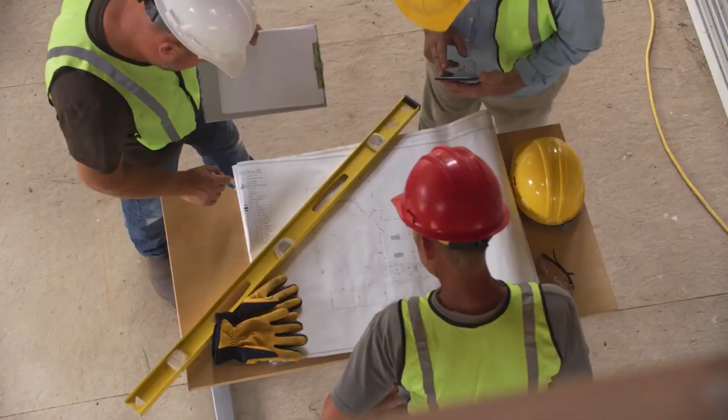For decades now, there's been an environmental movement raising important questions and inspiring more sustainable solutions. Just compare yesterday's gas guzzlers to today's electric vehicles, or how recycling has almost become second nature. Over the next 10, 20, 30 years, zero net carbon building standards will be a key component in addressing the impacts of climate change we are now facing.

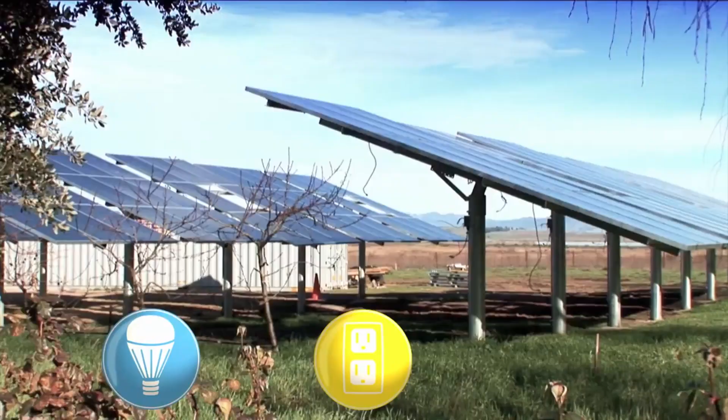You might be wondering, what exactly is a zero net carbon, or ZNC, building? In a nutshell, ZNC buildings have three characteristics: they are energy efficient, they are fully electric, and they use carbon-free energy sources, such as solar or wind, to meet operational energy needs. This concept applies to all building types: homes, businesses, schools, fire stations, you name it.

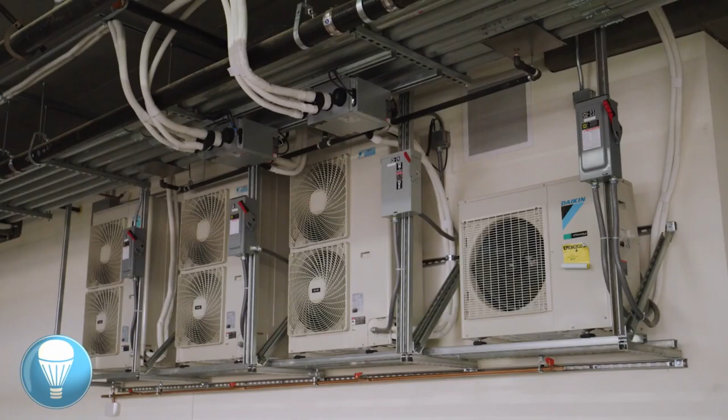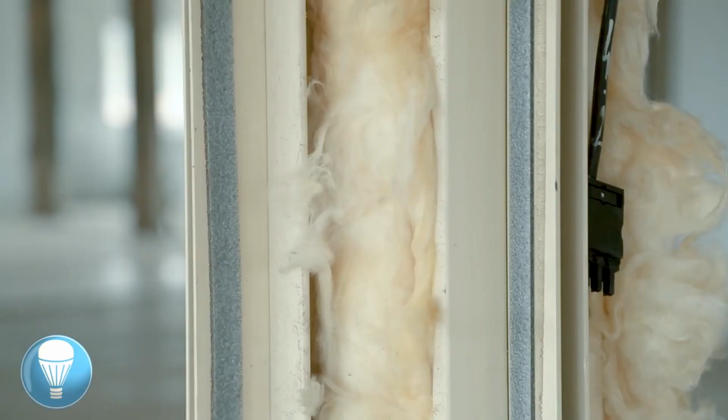A ZNC building starts with energy efficiency. One of the simplest ways to improve efficiency in an existing building would be to install LEDs or use natural light and buy ENERGY STAR labeled equipment and appliances. Did you know natural lighting has been proven to improve learning in classrooms and employee productivity? ZNC buildings feature ideal interior climates and less noise pollution due to energy efficient insulation. New technologies like smart thermostats work with these improvements to only use energy when and where it's needed.

ZNC buildings must also be fully electric because natural gas, which is mostly methane, produces greenhouse gases and decreases indoor air quality.

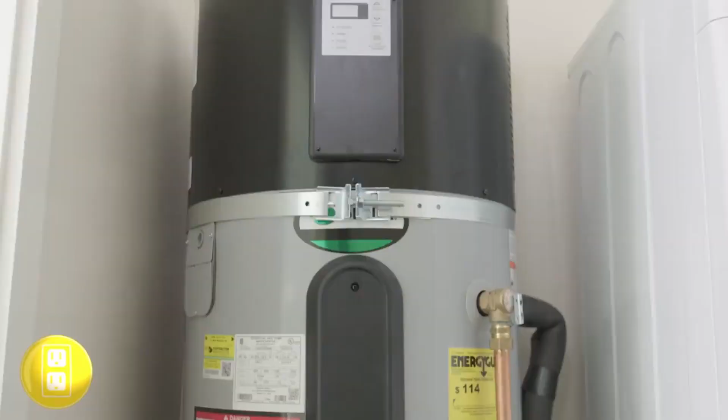Efficient electric options such as induction cooktops and heat pumps for heating spaces, cooling spaces, and heating water are already widely available. The third key part of a ZNC building is ensuring the energy used is carbon-free.

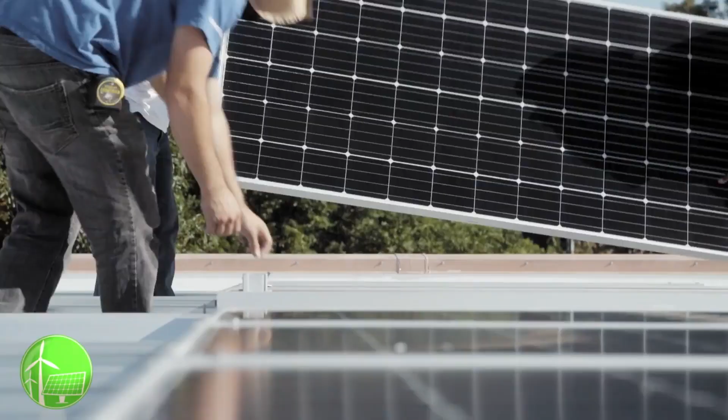Harnessing the power of the sun will go a long way to make that happen. The costs to install solar have declined dramatically, simplifying the decision to choose solar energy production.

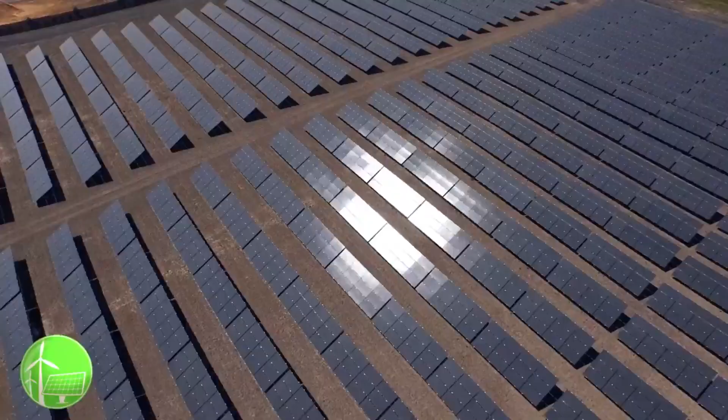Even better is when on-site solar generation is paired with battery storage and electric vehicle charging stations to add both convenience and reliability. For buildings that are not well suited for solar or can't generate enough energy to meet their needs, ZNC is still achievable by purchasing 100% carbon-free or renewable electricity from your power provider.

The strongest ZNC benefit is the improvement in quality of life for you, your family, and the community, with utility cost savings, cleaner air, and more comfortable living spaces.

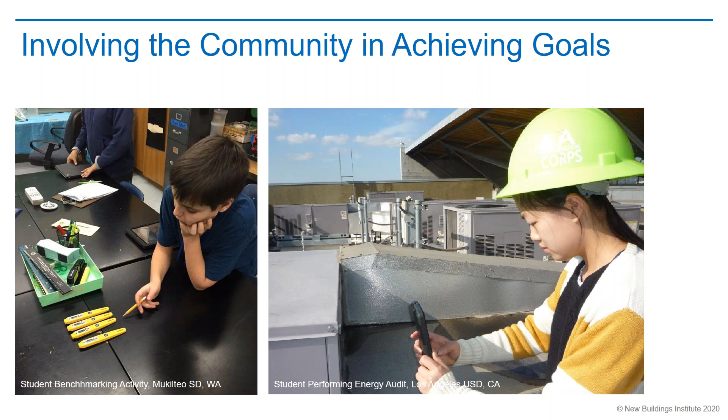So I'm going to tell you a quick few stories as examples to really showcase how powerful storytelling can be. I hope some of you come out of this really jazzed and excited about what the power of students and the power of the Zero Hero can do.

The first two are powerful because we as adults, even those of us who are Zero Heroes and may drink the sustainability Kool-Aid, can be constrained by things like societal norms and budgets, making it difficult to find new solutions. Students really have the ability to think outside the box and gain support for solutions that benefit the whole school in a way we might not be able to.

Focusing in on California, in Kern High School District in Bakersfield, students rallied the school board and testified with real data they analyzed about how much money the district would save by switching to solar. In partnership with SunPower, the district installed 22 megawatts of solar power systems at 27 Kern High School District sites. With the new solar installed, the district will save - wait for this number - $80 million over the next 25 years, which can be reinvested back into the schools.

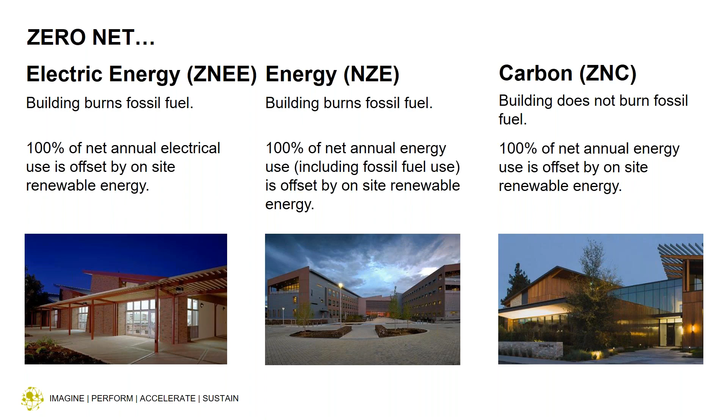Having said that, the first part of this presentation, what I want to do is show you that there's already been a lot of schoolwork done that's net zero energy. It's not something that's brand new, and it's not terribly difficult to do, especially here in California. There's already a fair amount of it that's been done, so it's not something to be scared of.

So this is our first net zero electric energy project. It was done back in 2004, so that's 16 years ago. It's in Campbell Union High School District, Westmont High School, and then another project, Delmar High School, another science building.

In that same district, later we went in and did PV projects in the parking lots for all 8 sites that they have. Interestingly, you could call this net zero electric, but actually it would really be net zero electric energy costs, because the PV systems were slightly undersized so that the bills would go down to zero. That's probably no longer the case because the rate structures have changed and the high rates have shifted till later in the day, but anyway, these were at the time designed to be net zero electric energy cost.

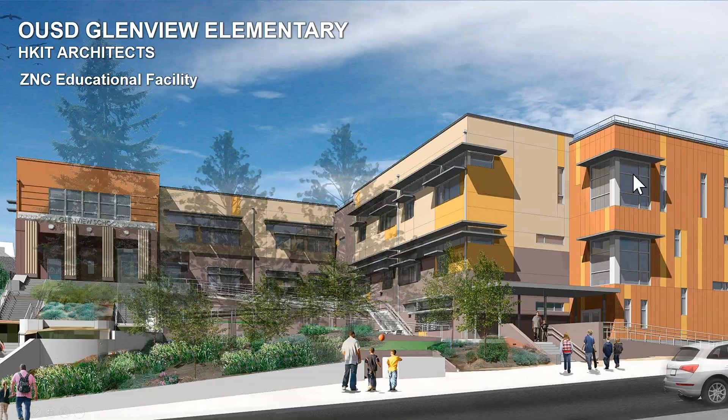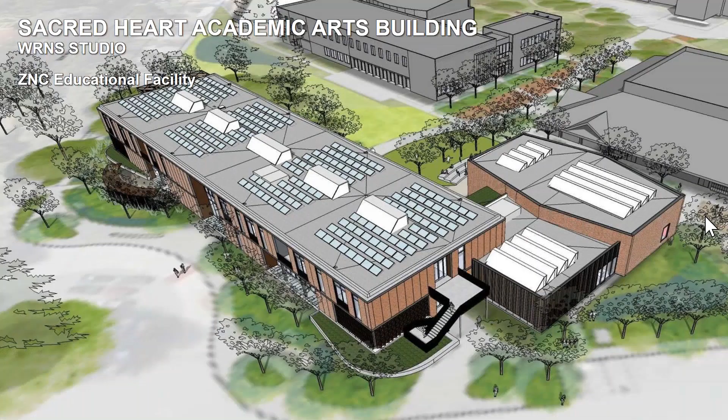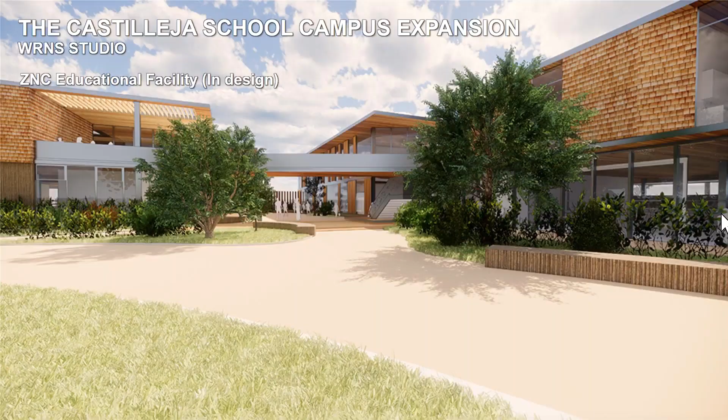We've done also a series of projects for private schools. This is Lick Wilmerding. All these are in the Bay Area: Sonoma Academy, Bishop O'Dowd, the Mark Day School - this one's just recently completed, so we don't have photographs - Sacred Heart Academic Arts Building, and Marin Country Day School Science Building. And one we have under design currently is the Castilleja School in Palo Alto.

Then we've also done some higher education projects: Pitzer College down in LA, CSU East Bay is in design, a library on the east side of the bay, and a downtown center for UC Merced. And then a couple of projects - these aren't schools, but I thought their significance was worth talking about, just so people can understand that this is really becoming a mainstream thing.

So this is one of a series of 5 projects that we've done that are remodels, low-cost remodels of existing buildings. This one was for a for-profit developer, and it's gotten to the point where renewables are cost-effective enough that he decided he could do this to make a profit. So this is the Indio building.

There's 3 new construction buildings that we've been involved with that are also for-profit developers, that are net zero or zero net carbon. And then we've also done municipal buildings that are zero net carbon, and a series of community buildings. These, John, were involved with - two libraries, one in Half Moon Bay and then another one in Hayward.

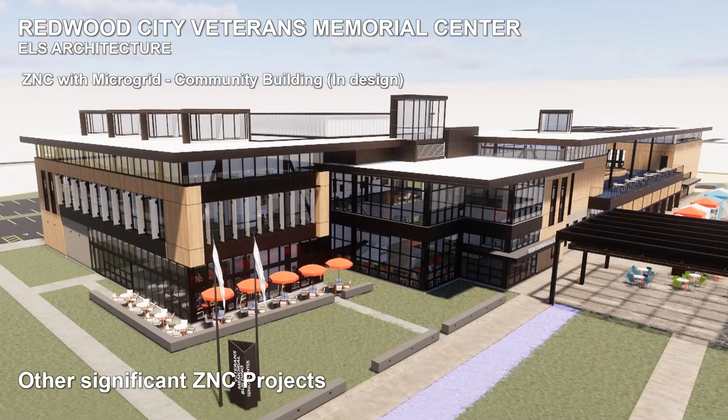And this last one is kind of interesting. This is in design still. It's not only zero net carbon for the city of Redwood City, they actually went a step further and are putting a microgrid in, so this building can be used for resiliency. So the idea is if there's an earthquake or a fire event, that they can use this building if people lose their homes to temporarily put people up.

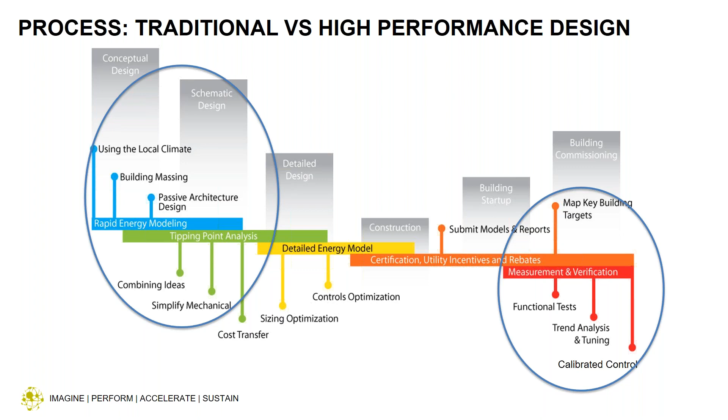So one of the things we talk about a lot is the idea of cost transfer, and that is focusing on passive architectural strategies that can save a lot of energy in the design of the building through simple strategies that I mentioned: siting, organizing the building, solar orientation, natural cooling, etc., that will allow you to reduce the size and complexity of mechanical systems.

And then ideally, you can take the budget out of those mechanical and electrical systems and move it into the architecture budget for the project, enhancing that architectural budget. This is really great for the owner, the school districts, or the school leadership, because you're investing in the architecture of the building, which lasts 50 plus years, instead of engineering systems which only last 15 to 25 years, have to be replaced, require maintenance, and use energy. So the more you can focus on architectural strategies to save energy and get down to the EUI, the annual energy target you're looking for, the better.

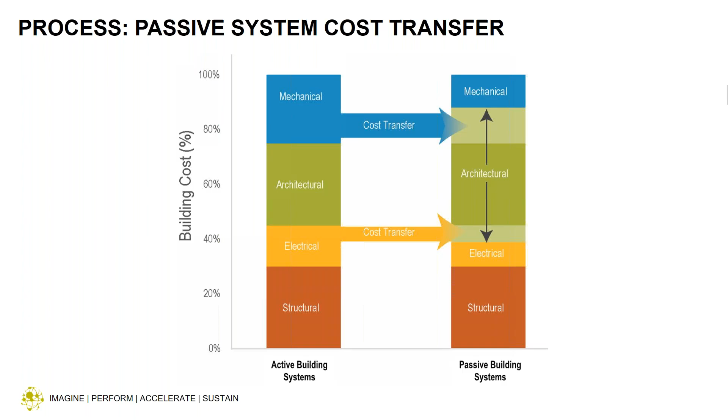All right, so let's look at a couple of strategies. I think the video was great that we saw, and it kind of started to investigate a little bit on the strategies, but let's talk about it a little bit more here.

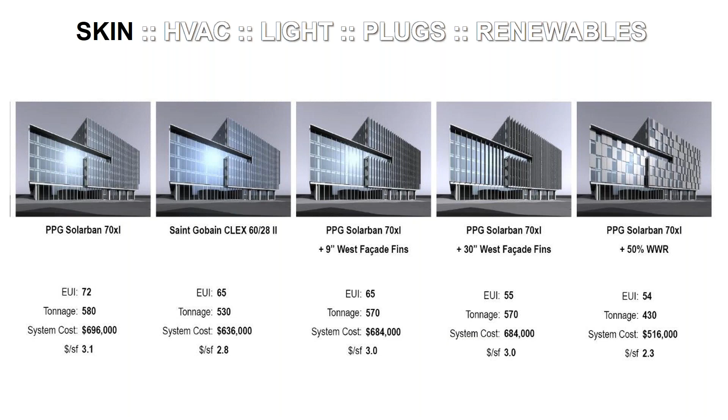Same with this mechanical system cost, reduced, reduced. So now you've got the ability to find this cost transfer, find ways of optimizing the envelope to reduce the size and complexity of the mechanical system, reduce the overall energy use, by putting more into the envelope of the building.

And similar to this project that David actually showed you a couple minutes ago, this fixed budget project, typically the idea of adding a very large, intricate brise-soleil type screen on the outside of the building to control solar gain might seem like it's not going to meet the budget of the building.

However, on this project, what you see on the bottom two screens is an indication of solar radiation hitting the building. We were able to reduce the mechanical system size and complexity on this project to take out of the mechanical systems budget the cost to pay for the brise-soleil, the big shading device on the outside of the building, and turn this building into a zero net carbon building with a really reduced EUI. That's another example that could apply to any kind of education building.

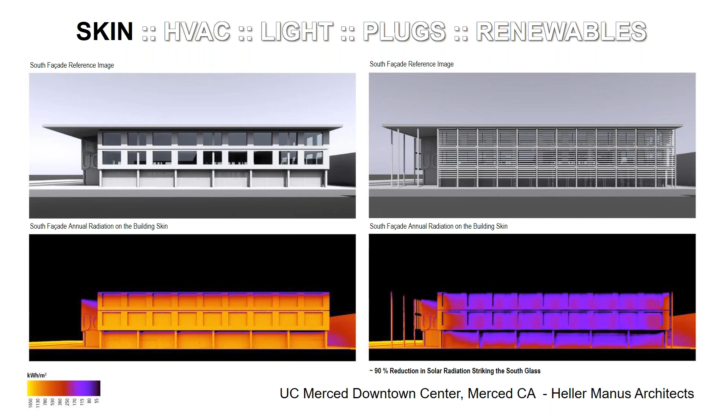Next. So skin was first, HVAC is second, and like you heard in the video, it's all about heat pumps. That's your methodology for getting to an all-electric building.

And there are so many versions and flavors of heat pumps. I thought a lot about how I would explain all of them in this presentation, and decided I wasn't even going to try because there are so many different versions. But commonly you'll see some of these on the screen—just a few of the sort of methodologies.

An air source heat pump on the far left is like an air-cooled chiller. If folks on the phone have seen or used that, it's not uncommon around the country to use those on small to mid-size education projects. The air source heat pump switches over from cooling to heating—essentially it works the same as an air source chiller, but also provides hot water, and it can actually do it simultaneously, chilled and hot water to your building.

In the middle is a VRF heat pump. You may have heard of this as it provides refrigerant to the buildings and to fan coils in buildings. We are somewhat shying away from this system because of the high global warming potential due to leakage of refrigerant. The manufacturers are working hard to mitigate that, but it should be taken into account if you're considering VRF heat pumps.

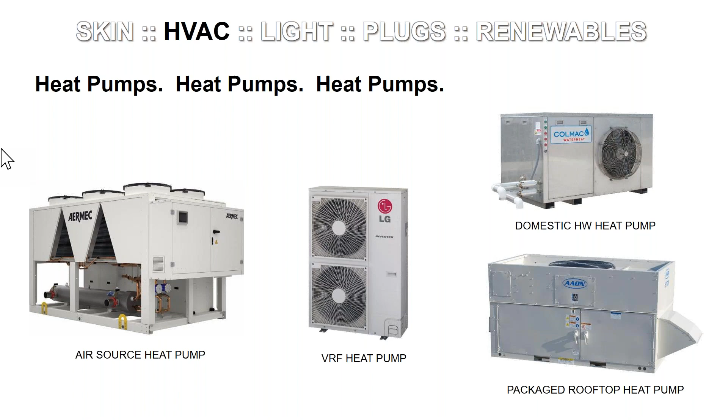The other important mechanical strategy on most, if not all, of these zero energy projects we're doing is using heat recovery, especially if you have a DOAS system, which brings fresh air into the building decoupled from the cooling and heating systems. When you're doing that, you can pre-cool or preheat that fresh air coming into the building using heat recovery. It's very common in California and where we're doing a lot of our work, but I think also common elsewhere in the country. It's quite important to reduce that EUI and deal with the energy it takes to cool and heat the fresh air coming into the building.

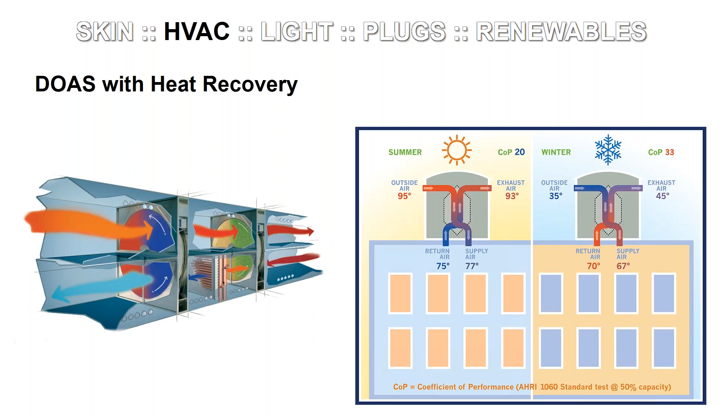Even doubly so if you bring 100% fresh air into the building, which is sort of the current thinking around how to design in a post-COVID world. Schools, offices, or any other kind of building is bringing more fresh air into the building, even 100% fresh air, instead of recirculating air. These are recommendations from ASHRAE on how to mitigate transmission of aerosols, et cetera, in buildings. So that's a super important one. Go to the next one, Dave.

Also put in the HVAC category is ceiling fans. We use ceiling fans in lots of our projects, and there's a great deal of data out there on how well ceiling fans can increase thermal comfort while increasing the temperature in a building.

If you look to the right there in the red circle, you can see that for a typical airspeed of a ceiling fan, the comfort range, which might normally be for cooling between 70 and 76, can extend up from 74 to even over 80 degrees, where people are comfortable if they have enough air movement on them. This is really important to reduce energy use and actually provide higher levels of comfort at higher cooling temperatures. So you're setting your thermostat up and using low energy ceiling fans to move air. It's a great strategy, and I'll show you an example in a minute.

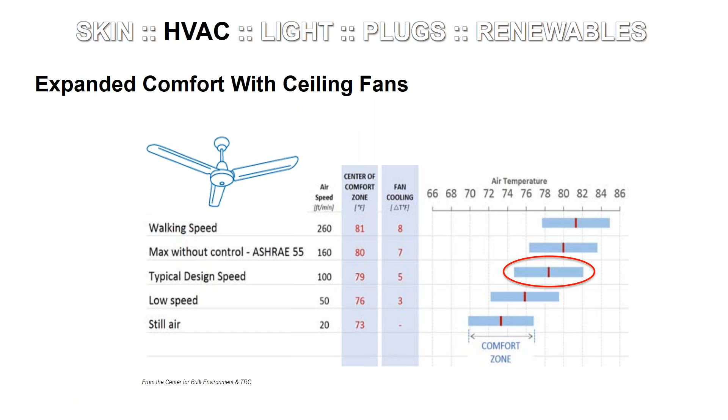Next slide. The other thing we do a lot here in California and in the West predominantly, but also of course done in more humid climates, is natural ventilation. We have lots of school buildings and other kinds of buildings that use manual and automated windows for natural cooling, and the automated windows are particularly useful for what we call night flush.

If you're west of the Rockies, we get these very deep swings in temperature at night, so cooling off the building, cooling off the mass of the building, exposing some of the concrete and other massive components of the building, and letting it cool off at night is a great way to modulate the temperature in the building and reduce the need for cooling.

In the example graph you see here, the building on the left side is predominantly all naturally cooled, even though it has a cooling and heating system and heat pumps. The strategy with using some automated windows is so effective that even when it's 88 degrees the following day, because the night is nice and cool and gets down to 56 degrees, cooling off all the concrete mass in the building allows it to modulate temperature, and without any cooling systems engaged, the temperature in the building never gets above 74 degrees.

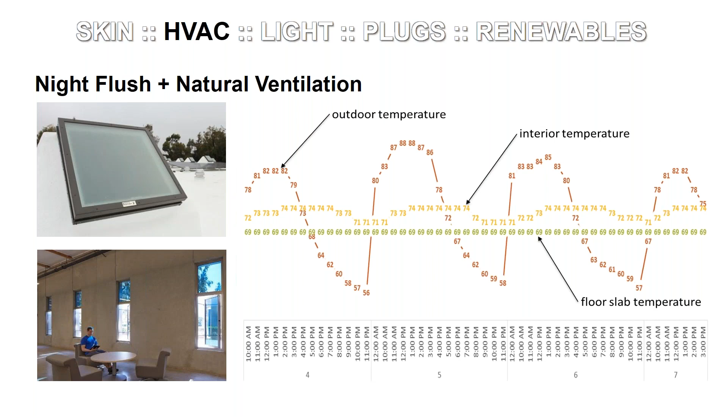So getting into light, this is starting to become a no-brainer: use LED light fixtures. The efficiency of LED is higher than anything else out there now. And then the knock-on value of LED is that when you combine it with daylighting and put dimming in, LED turns out to be much more efficient at dimming than fluorescent or incandescent. So you get higher efficiency to start with, and then as you dim down the lights to accommodate daylighting, you even get better efficiency.

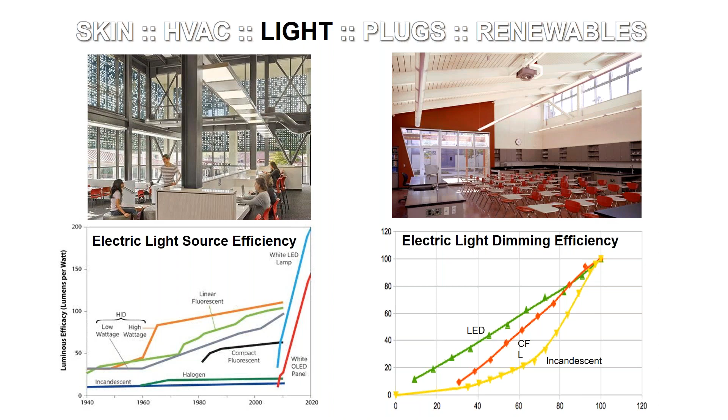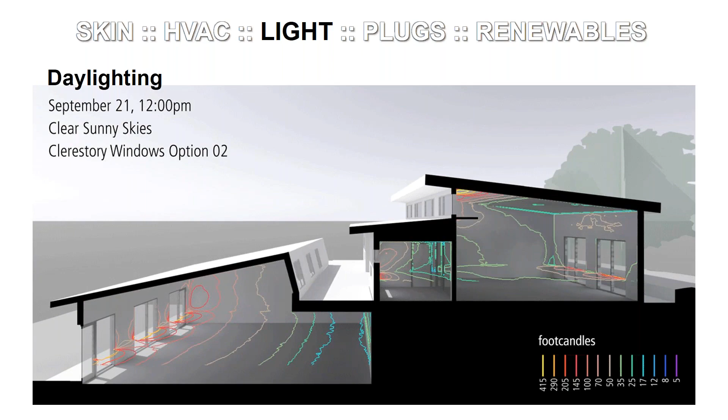In addition, for new buildings it's code that you have to have plug load controls, but in existing buildings you can put in things like countdown timers or plug strips with occupancy sensors to turn things off when there's nobody in the room or on some kind of a clock.

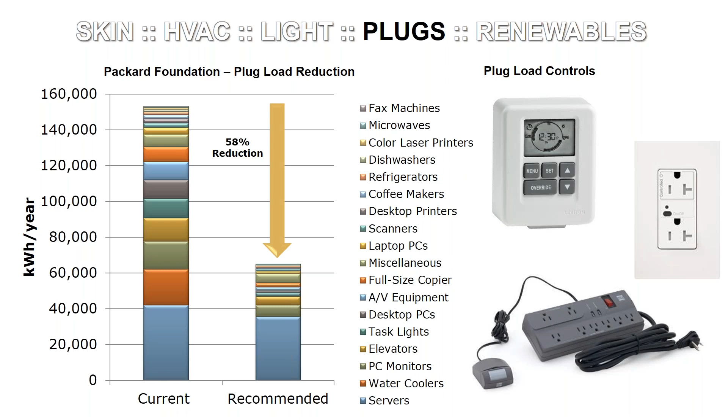The last thing—we put this under plug loads, though technically it's not—is that we're starting to do a lot of all-electric kitchens. I think that's a big thing, with potentially quite a bit of energy savings. I've done projects where they've cut energy use in the kitchen in half or below that.

One of the key pieces of equipment is induction stovetops, which are electric and perform, I'd argue, better than gas. They're also more efficient and have a lower requirement for ventilation. So a lot of the energy isn't just saved at the stovetop—it's also saved in the reduced ventilation and reduced makeup air you need.

Another device is the combi oven, a high-tech oven that uses wet heat, not just dry heat, along with convection to cook things. These ovens are programmable, so you can get better control over the quality that comes out of them.

Then, once you've gone all electric and reduced energy use as much as possible, you put renewables in. The great news is that the installed cost of solar panels has come down dramatically over time, so it makes good financial sense in general to put solar panels in.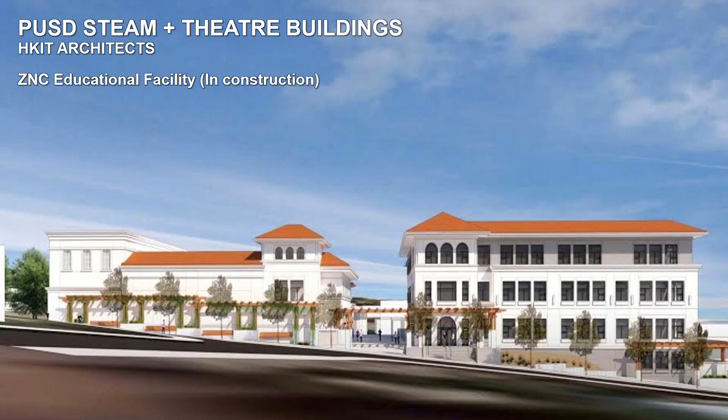I'll present a case study of a public school project currently in construction. It's a ZNC project for PUSD, Piedmont Unified School District. There are two buildings in this project: one is a STEAM building with engineering and art labs, and one is a theater building. The architect for this project is HKIT Architects in Oakland, California—you saw an image of another one of their ZNC projects earlier in the presentation. They do a lot of public school projects and are becoming quite the expert at zero net energy and zero net carbon building design.

Real quickly, we started with a benchmark at the beginning of the project for what these types of building energy use would be in the climate zone where it's located—Piedmont, just outside of Oakland, California. Then we set a rough order of magnitude energy target for zero net carbon. This was at the very beginning of the project, and we started to think about how we were going to get there.

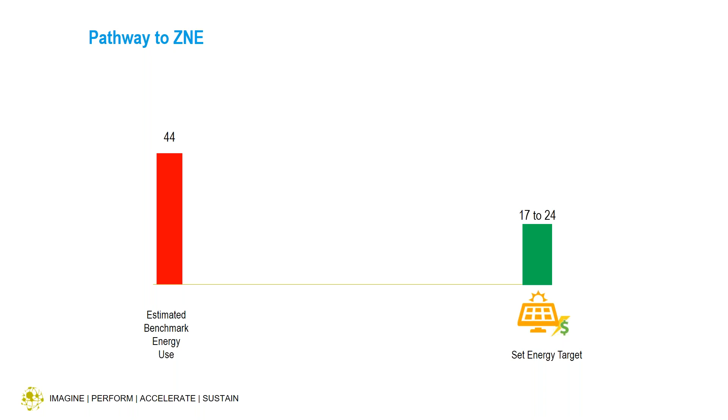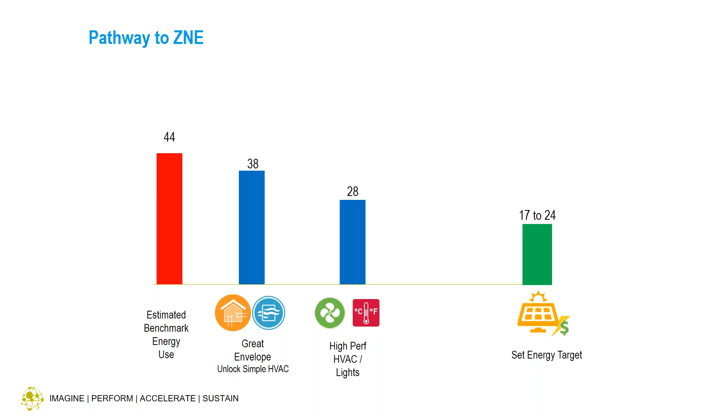The first strategy was working on the envelope, as I've mentioned before, bringing the EUI down from 44 to 38. Next was working on high-performance HVAC systems to get down closer to around 28. Then managing equipment energy, the plug load energy Dave was talking about, to try to get down to where we thought we needed to be to hit our zero net energy, zero net carbon target.

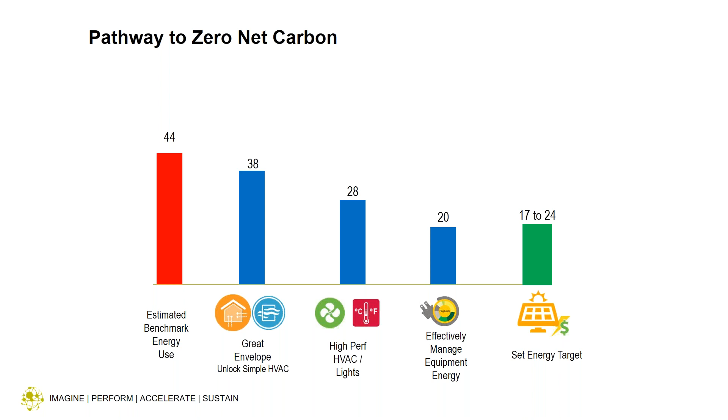Early in the design process, at the schematic level, we were looking at multiple HVAC options and all-electric options. We did rough order of magnitude energy modeling without knowing a lot about the building's form and function and programming, just trying to target different systems appropriate for this school building, particularly the STEAM building. We developed early strategies including a VRF strategy and an air source heat pump strategy, and on the inside of the building looked at two options: fan coil units delivering air to the space, or radiant cooling and heating in the slabs, which was our other option and would get us lower energy use because you're eliminating a tremendous amount of the fan energy typically associated with these kinds of buildings.

So that's early stage. The bars at the bottom, the green and yellow bars, are quite large because we didn't have a lot of information about how the building was going to function, so those were pretty conservative. Go to the next slide, Dave.

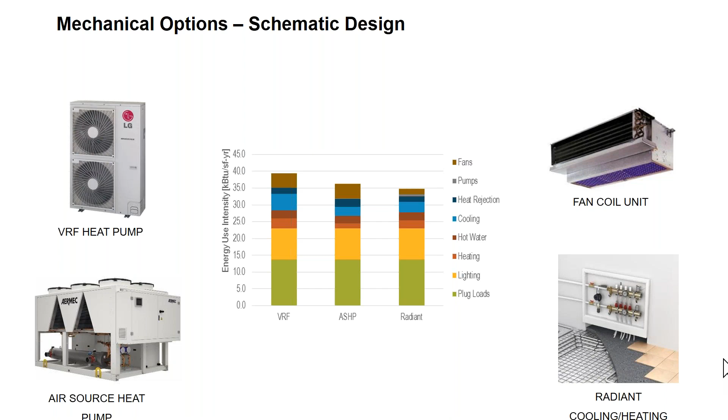So we were very aggressively looking at envelope strategies after that schematic design stage to see how we could get that EUI lower and lower. Go to the next slide, Dave.

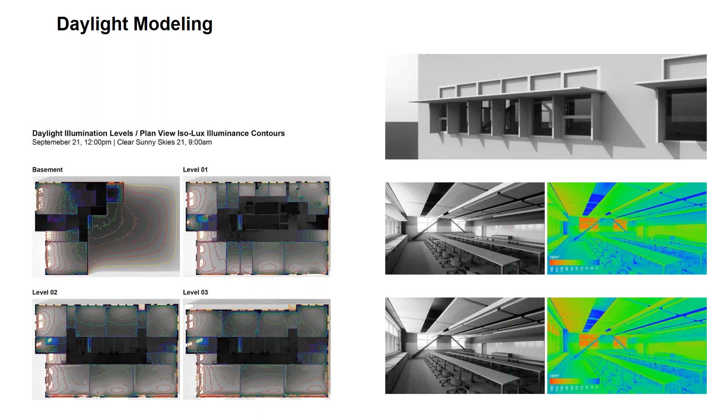And we did that. We got the EUI down a good bit lower and decided to go with the radiant cooling and heating strategy in the STEAM building to hit our target EUI, which was 24, based on the capacity of renewable production we could achieve on this kind of unusual site.

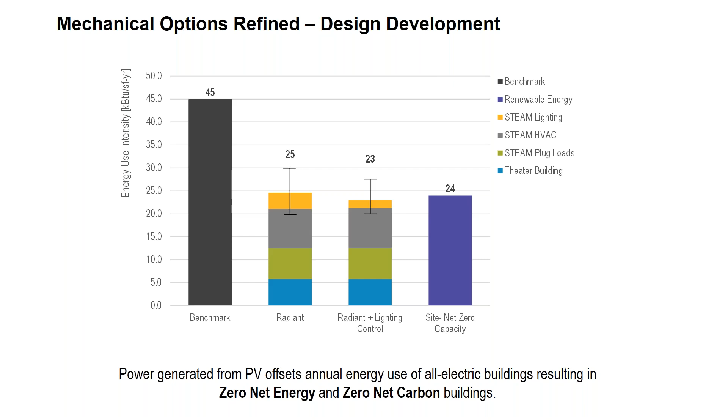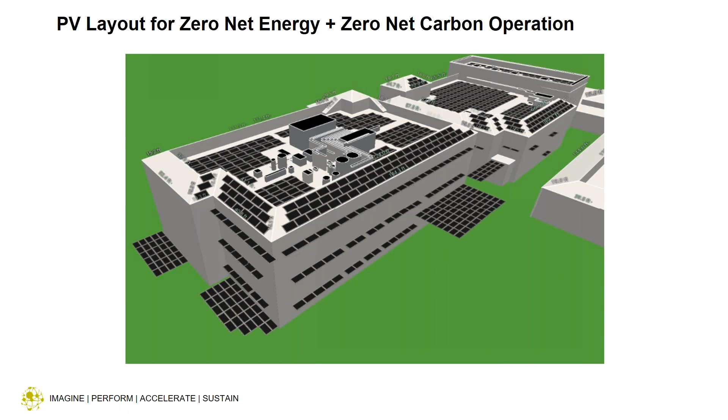Go to the next slide, Dave. There's quite a lot of topography on this site, and the form and architectural style of the buildings required us to do some pretty creative things with the PV design in order to maximize production. You can see all the different places where we're proposing the PV goes, so we can maximize production and get to that 24 EUI target. That's a lot of different PV installations, requiring a full design of the PV system. The PV actually came from a third party through a power purchase agreement for this project.

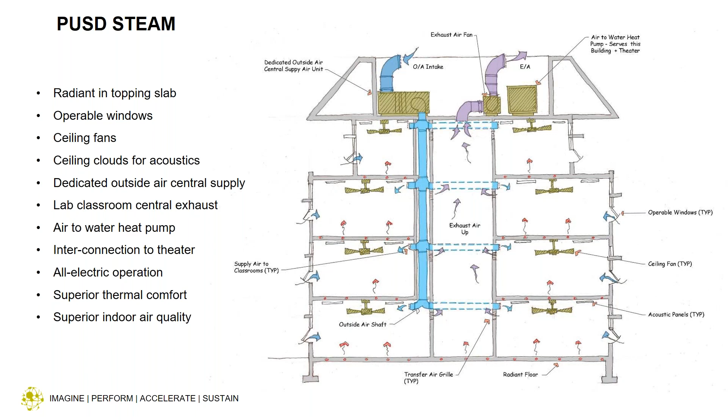As mentioned at the beginning, there was this theater building that was also part of the project. The air source heat pump on the STEAM building also provides chilled and hot water to this building, which uses a displacement ventilation air system under the seats in the theater to provide cooling. Again, these are all-electric buildings, with all-electric domestic hot water.

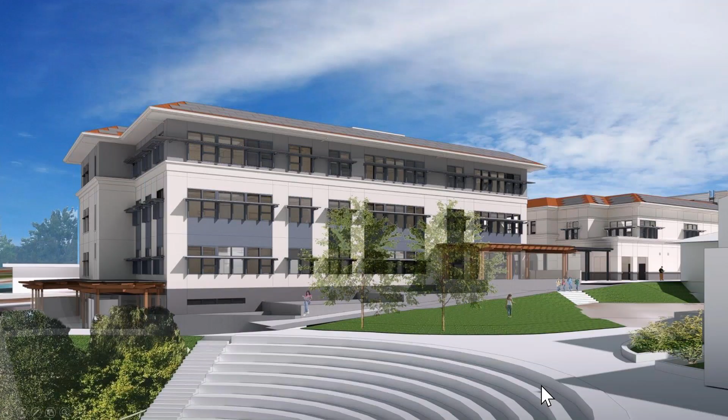This building's on the next slide. There's a nice rendering of the final design. You can see the shading devices and the PV up on the roofs, on the mansard roofs, and so on. These projects are under construction now, and again, it's a great example for a public school project of how to make the right trade-offs of cost and architectural and engineering strategies to hit your target zero net carbon energy use and production.

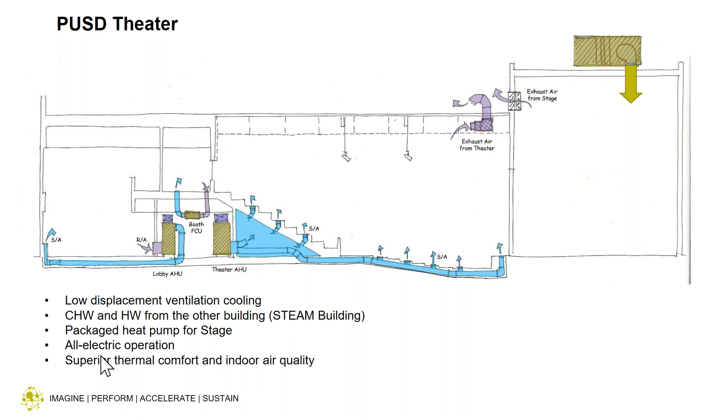Next slide. We're going to talk a little bit about what we think is on the horizon, the next big things. One of the things we're thinking a lot about and incorporating into a lot of projects these days is mass timber.

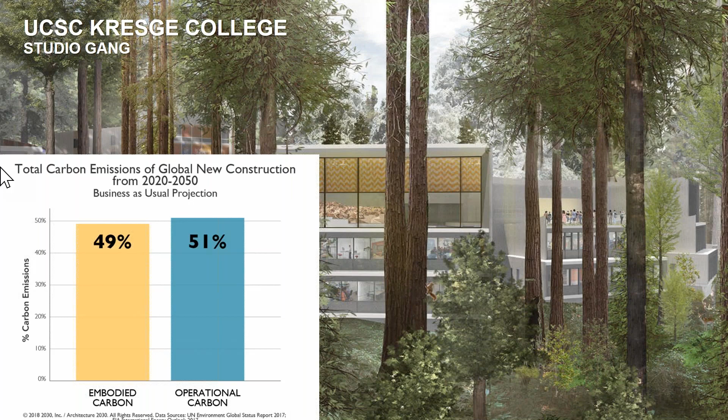This project, Kresge College at UC Santa Cruz, is an all-electric project with 14 different buildings, and we're hoping it will end up being a zero net carbon project. Although we can't produce energy from PV on the site because of all the tall trees, there's a PV array elsewhere on the campus that we're allocating toward this project, plus the university purchases zero carbon energy in addition to that. So even though this is a multi-building project, we're going for a total zero carbon strategy using mass timber and all-electric renewable energy.

I wanted to talk about a couple other interesting things going on. One is that some utilities, like Silicon Valley Clean Energy in our area, are sourcing 100% of their energy from carbon-free sources. They say they're 100% carbon-free power, but what it really means is 100% net carbon-free power. So if you're in that area getting your power from Silicon Valley Clean Energy, you could say your site is carbon-free—however, there are some interesting things to look at.

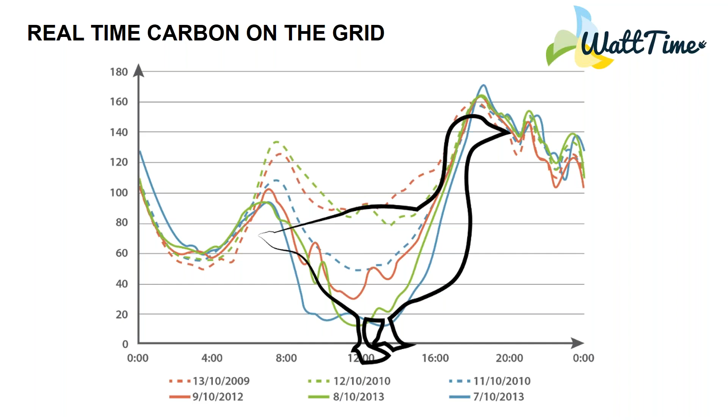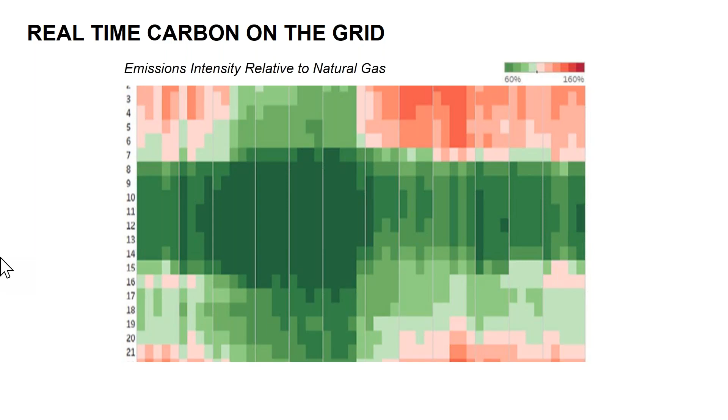So that gets to the point of why should you, if you could have 100% carbon-free power, why should you put renewables on your site?

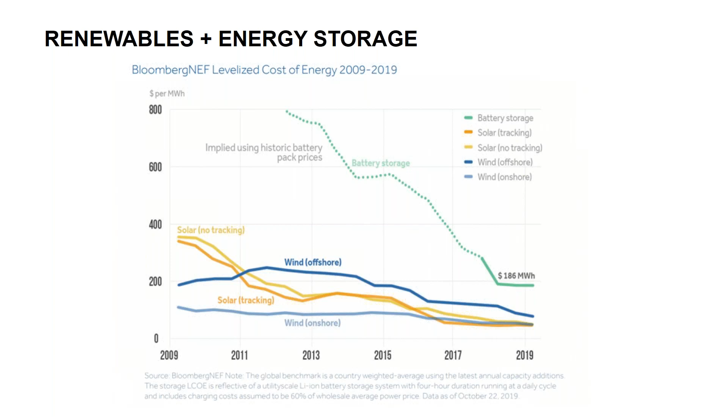One of the interesting things we've started looking at for schools is battery storage. We're in design on a couple of projects, and it's an interesting concept that you could tie renewables and battery storage together to do two things. One, you could store that energy and release it at a time when there is carbon on the grid, helping to reduce overall carbon on the grid. The other thing is, as we're starting to have power outages during fire season, if you have a small battery, potentially you could bring your system back up during a fire season outage and run off the PV system.

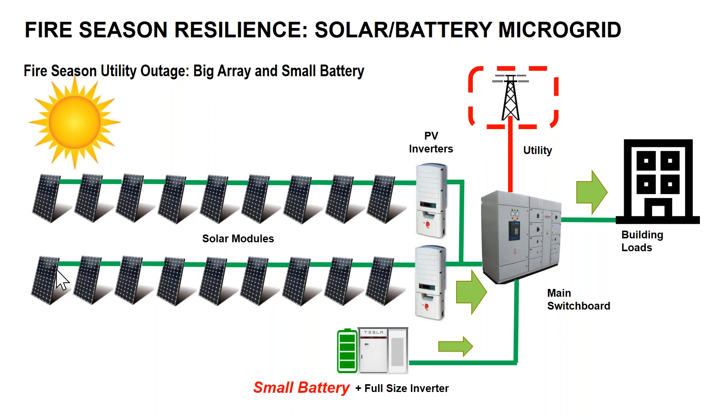With PV alone, you can't turn the power back on during a utility outage, but if you have a battery tied into a microgrid, you could. So if you have a big PV array, you could potentially keep the school open and running during those times. With fire season outages, that's a big thing.

The last thing I wanted to throw on the table for designers to think about is EV charging. EVs are becoming a bigger and bigger thing. This is actually a charging setup at Prospect High School in Campbell. As time goes on, there's going to be greater demand for EV charging in parking lots, and that energy needs to come from somewhere too, so there may be an argument for putting in more photovoltaics in those cases.

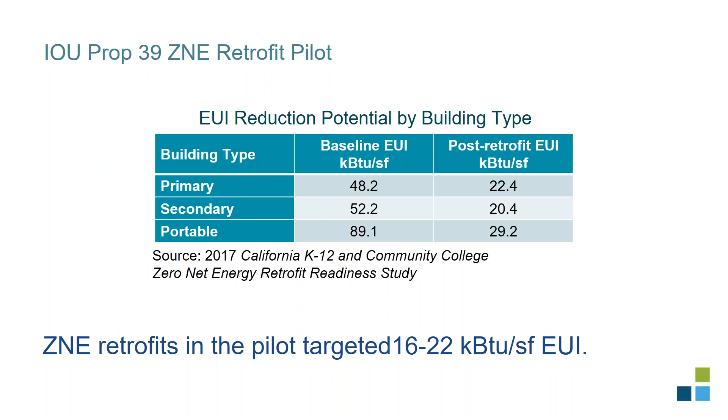Just a quick note, again echoing some of the earlier notes on zero net energy versus zero carbon. In recent years in California, there's been a switch to zero carbon goals, but this pilot was designed in 2014, and at that point the focus was more on zero net energy. We were looking at this from a site and a source energy perspective. For site energy, that meant taking the gas and electricity and converting that to a common unit, then taking national Department of Energy source multipliers to get your source energy use intensity, which represents how much energy is used at the very beginning of the process to get that energy to your site.

In this case, the national multipliers have electricity at about 3 and gas at about 1. So in some cases, gas measures were recommended as a more efficient option from a source perspective. If you switch over to the more recent zero carbon goals, in California, as our grid gets cleaner and cleaner, the relative emissions from electricity are going down over time. Gas is staying pretty steady, so you're generally going to see electrification as the recommendation there.

I'll split this into 3 main topics. First is some guiding lessons learned, which will echo some of the notes Riley talked about, and which I think are really helpful when framing your package. Then I'll talk about some technologies we saw commonly across the projects. And finally, I'll go over some brief cost and energy impact.

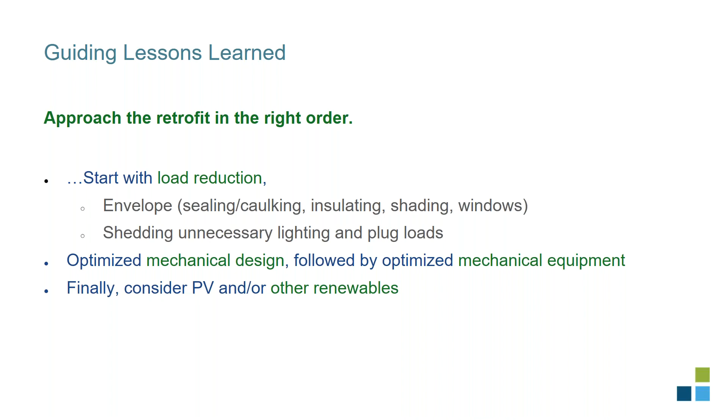A big thing is making sure to highlight the non-energy, non-monetized benefits to the schools rather than expecting energy savings alone to pay for aggressive whole building retrofits. We thought this might be a sticking point for schools, but we found that schools came to the table saying, these are the things we want. If we can save energy and money at the same time, that's great. One school consultant said it well: the ultimate goal is a learning environment that's the best we can possibly get.

Also be cognizant that in a retrofit scenario where we're trying not to affect occupancy, any minor delays can really delay your construction timeline. We were trying to get all the work done over the summers or over breaks, so a small delay sometimes meant we were delayed by an entire year.

Echoing Riley's Zero Hero, strong advocates were absolutely critical to the successful project. For us, this often wasn't the final decision maker, but someone who could help us navigate the landscape of the school. In our on-site meetings, it was really important that we had both decision makers and facility staff in the room, so we had folks familiar with the day-to-day nitty-gritty operations, but also folks who understood district-level decisions and could help us think through what was feasible or what wasn't.

Now I'm going to go through some of the common technologies we saw. You'll see there's a lot of overlap with the new construction technologies from the last presentation, but because we're looking at a retrofit, we had a slightly more constrained set of options.

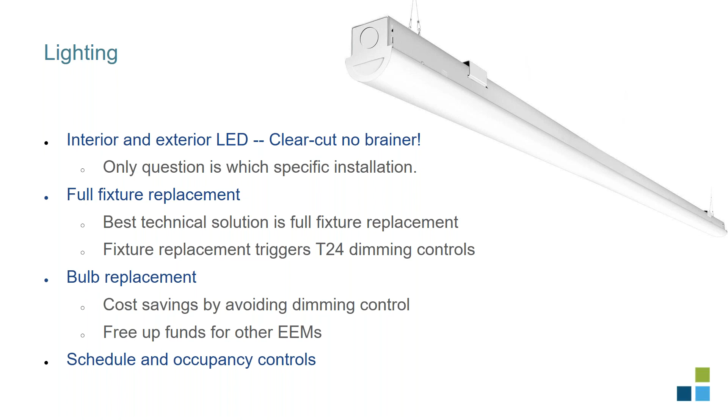For daylighting systems, something we saw was that in schools there was a trend in the 70s to cover up existing daylighting systems—painting over clear skylights, covering beautiful skylights. This was typically done either because of perceived distraction or poor thermal performance and glare issues.

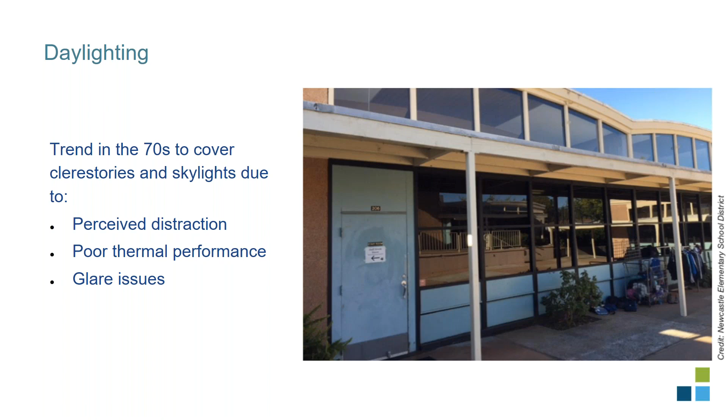For daylighting, the first thing we did was look at harnessing any existing systems—uncovering skylights, removing paint from windows, and retrofitting those with appropriate glare control using window films or shading devices. After assessing the potential for existing systems, we considered introducing tubular skylights or light shelf retrofits. The picture here shows a combination of LED lighting and tubular skylighting, and the installation is quite lovely—it's pretty hard to tell the two apart. The square ones are flush-mounted tubular skylights, which is important for many schools, since they need the flush mount to meet earthquake safety requirements.

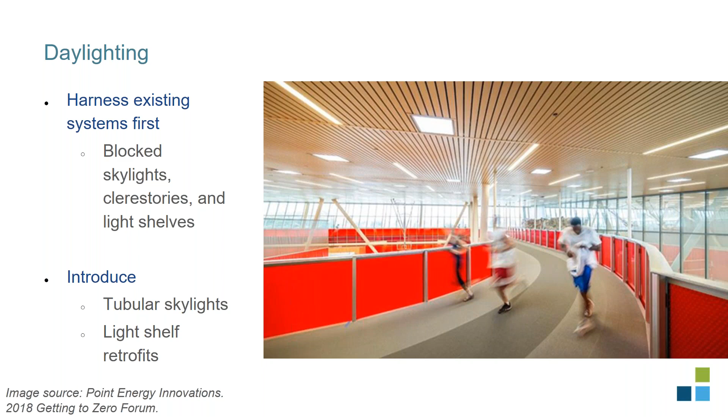Again on daylighting, this is a light shelf retrofit—the same classroom in both cases, with the lights off. On the right-hand side, a light shelf was introduced. This allows for a more consistent luminance level across the classroom, avoiding the glare issues present in the original scenario.

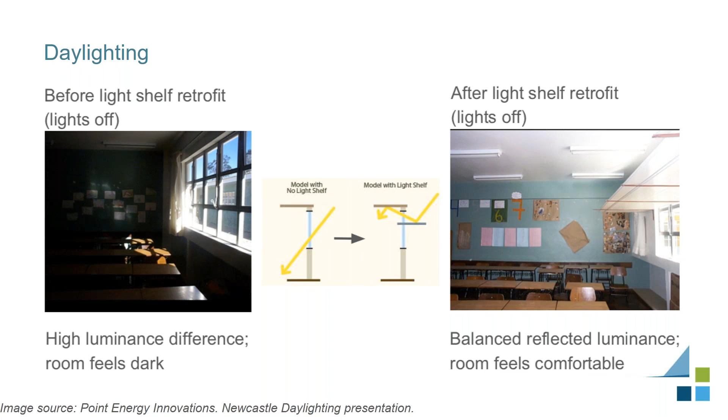When we were thinking about daylighting solutions, we had to think about this as an entire package. So if we were thinking about roof penetration, we needed to understand first whether the roofs were due to be repaired or replaced, and whether penetrating the roof was a feasible option.

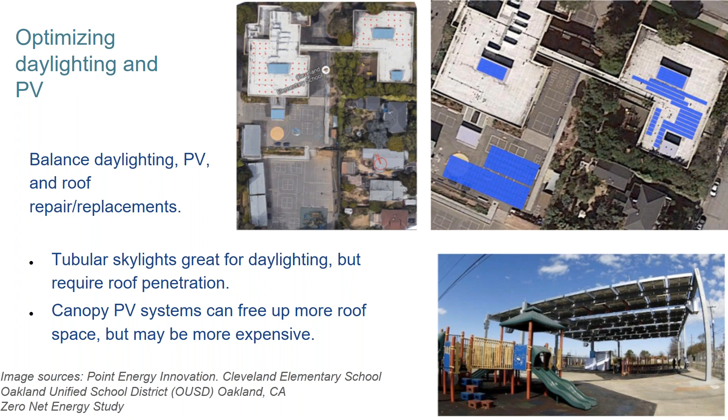If we went with tubular skylighting, that was great for daylighting, but it meant penetrating the roof and taking up some space. If that meant we didn't have enough space on the roof for our PV system, one option was to put that on canopy systems, either above play spaces or above parking lots. But sometimes those are more expensive.

HVAC is probably the most complicated of these, because there are so many options out there. Overall, our goal was increased efficiency, but also improving ventilation, thermal comfort, and noise control. For a lot of these, they might only be cost effective if you're at the end of the useful life. The technology choice really depended on the existing system and whether the user was considering a fuel switch option. A lot of the schools wanted like-for-like replacements to avoid DSA reviews.

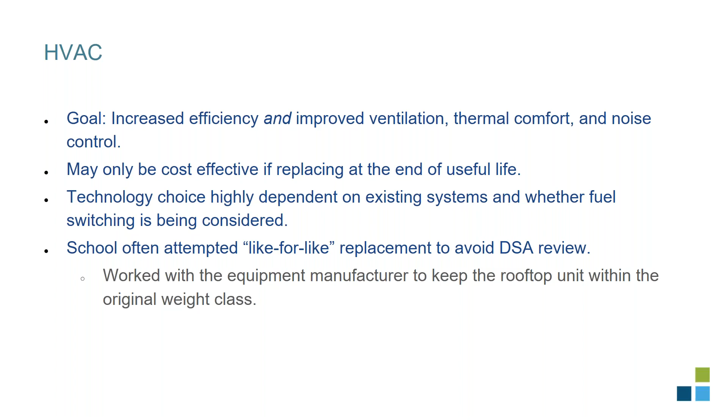In some cases, we worked with manufacturers. There was one where the more efficient rooftop unit was heavier, and they were able to come up with a custom mounting to stay within weight restrictions.

For the technologies, if you're going electric, it's heat pumps, which come in any number of flavors — these can range from single classroom units all the way up to rooftop package units. For gas systems, we were typically looking at high efficiency condensing gas furnaces. And then, as mentioned in the other presentation, any number of systems to supplement that.

We often see motor and pump replacements, climate-permitting economizers, evaporative condenser retrofits, and also ceiling fans, which let you have higher set points while still maintaining the same perceived level of comfort.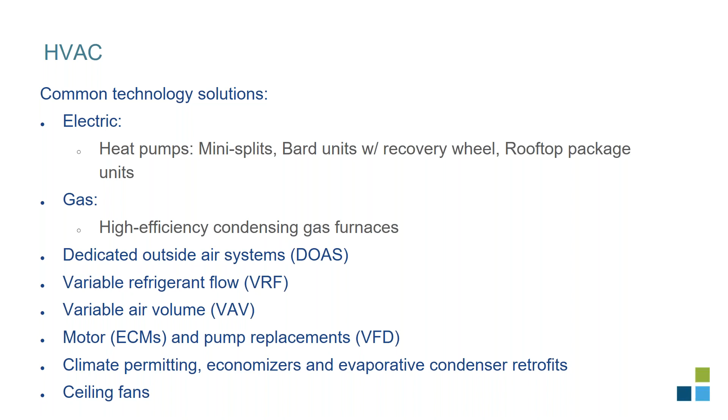Along with these, we looked at controls — either a building management system or introducing smart thermostats — looking at temperature set point management, occupancy sensing, and CO2 demand control ventilation. Some systems had package unit interlocking so that they could sense if teachers were opening doors, and the system would shut off to allow for natural ventilation.

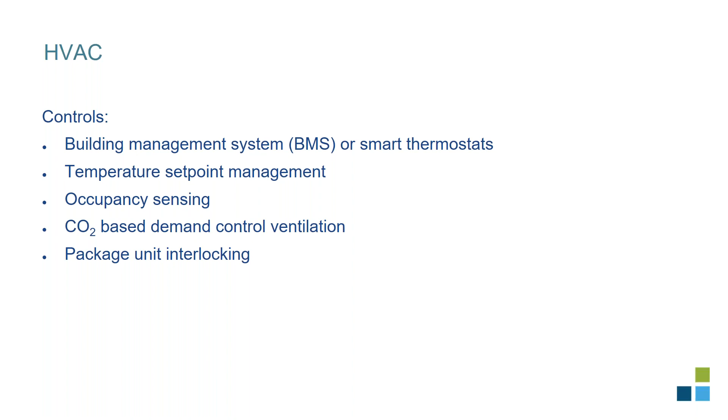For temperature set point management, this applies to both occupied and unoccupied spaces. We noticed that a lot of the server rooms had very low set points, and more modern technology can operate at higher temperatures. So in this case, we were resetting the set points to be in line with current ASHRAE recommendations.

Portable classrooms — if you're not familiar, until 1998 the state required 30% of classrooms to be portable if you were going to get funding. A lot of these are still in operation. They're aging, and schools aren't very excited about putting more money into them. So if we had a retrofit, it had to be something really simple.

One of those options was replacing the HVAC BARD units. One of the consultants said that when the Newcastle BARD units were replaced with quiet, efficient new ones, those classrooms became the envy of the school. You couldn't even tell the units were running while the teachers were teaching, and the rooms were comfortable and properly ventilated.

In this case, we had 6 classrooms and hoped to install 5 one summer and the 6th the following summer so we could have a clean data comparison. We were met with a friendly but firm no — all the teachers wanted them installed. So we didn't get our tidy data, but the teachers were all happy. So that was a win.

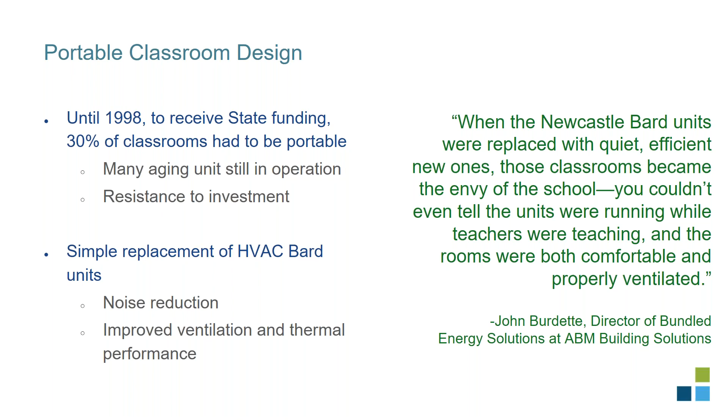Next, looking at domestic hot water — it was really important to understand whether the current design load was still appropriate. A number of schools said systems were designed for 100% of students taking showers every day, and that was no longer the norm. In some cases, the building's use had changed and they didn't need domestic hot water at all. So we wanted to understand whether it could be downsized or removed.

Once we understood those loads, if you're electric, it's heat pumps; if you're gas, we were generally looking at tankless condensing gas water heaters.

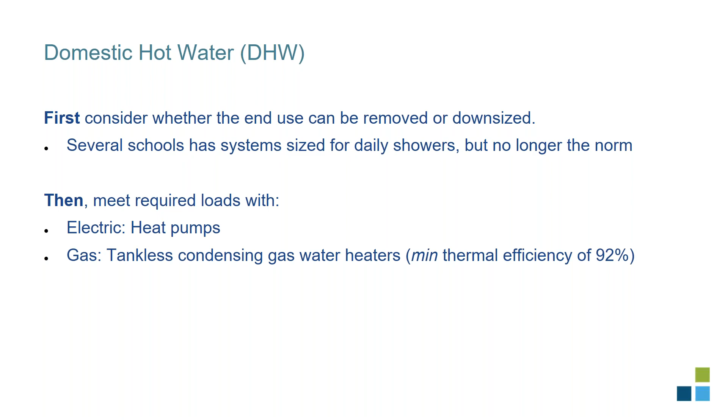Next category, envelope. One of the simple options is sealing and caulking, and here you have some potential for student and staff engagement. The picture on the right is from a student-teacher brigade at MIT's campus. In this case, they would have a group of students and staff come in and actually learn how to do the caulking retrofit.

They'd get it done in an afternoon, and the cost was just the materials and some pizza. We also were looking at exterior roof insulation, window films in conjunction with the daylighting design, and if windows were due to be replaced, low emissivity windows.

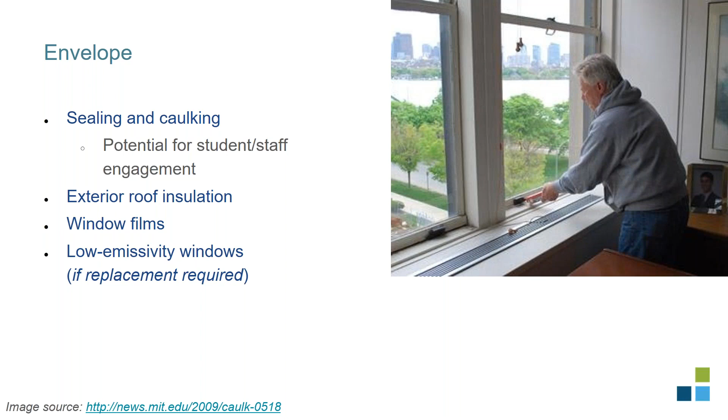Lastly, miscellaneous electric loads, plug loads. This was generally schedule control, looking at Energy Star or better appliances, vending machine occupancy sensing, and for server rooms, high efficiency right-sized UPS.

So finally, I'll talk just a little bit about the cost and energy impact.

Starting on the energy side, the table at the top is the results of our site and source savings: the average, minimum, and maximum. What we saw is that on average, from a site perspective, we were saving about 39%, 40% on source. Slightly lower than the percent savings we're seeing in the study I referenced earlier, but the baseline EUIs were also quite a bit lower, so we were starting with more efficient buildings.

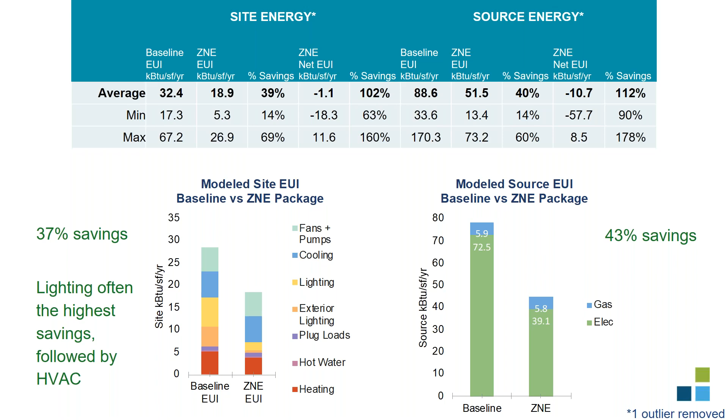The graphics at the bottom, on the left-hand side, we have site energy broken down by end use. If you look at the yellow section, that's lighting. I think in almost all cases, lighting was our biggest source of savings, followed by HVAC - that's fans, cooling, and heating. On the right side, this is source energy use intensity broken down by gas and electricity for the same building, and you'll see that in general, most of our savings were coming from electricity. These are a specific building, but they're representative of pretty typical savings we saw across the board.

For cost effectiveness, as I mentioned, this was a subset of the statewide program, which had savings-to-investment ratio limitations. They originally started at 1.05 and decreased that to 1.01. Our pilot did not have cost-effective constraints because we wanted to encourage the most aggressive measures.

For the schools that reported it, this meant that our simple paybacks range from 18 to 30 years, and the SIRs were 0.78 to 1.03, although that 1.03 was before DSA improvements.

This is my last slide, just breaking these down into high categories. The free measures were looking at schedule changes to existing systems, disconnecting your domestic hot water, and sealing and caulking. Generally cost-effective measures fell into interior and exterior lighting, plug load management. HVAC and appliances were maybe cost-effective if you were at the end of useful life, and then some of the daylighting options were expensive, but they had really enhanced non-energy benefits.

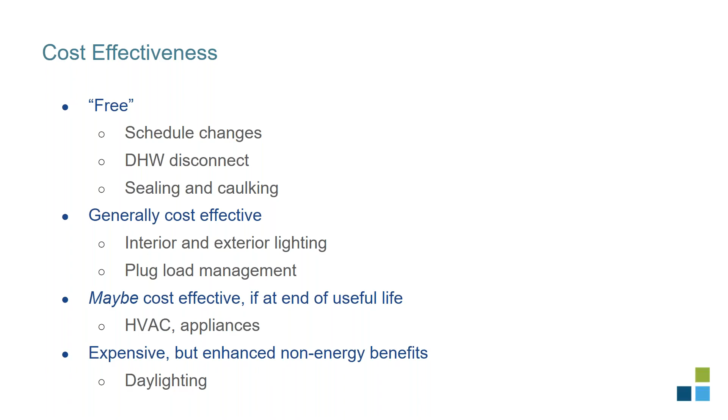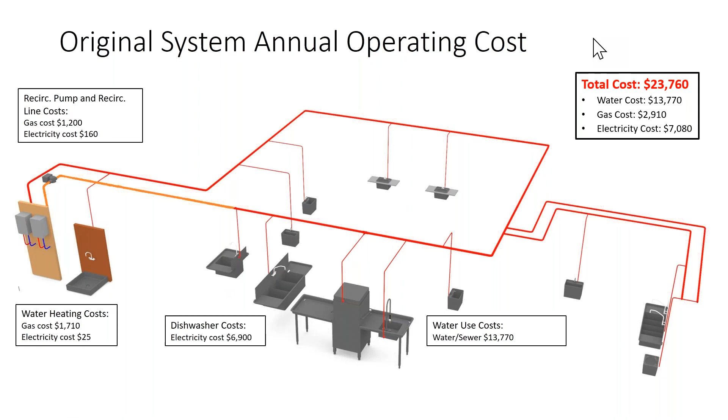By doing a bunch of hot water load shifting, we managed to get that number down to about 18,000. A couple of the ways we did that: one was by taking some of the largest hot water fixtures off of the hot water system, downsizing the total amount of hot water piping, and replacing two tankless non-condensing gas water heaters with one condensing tank-type water heater. Ultimately we managed to reduce our costs by about 25% here.

One of the things we wanted to do with this project: one of the barriers to using a heat pump water heater in a food service setting is actually the dish machine itself. Dish machines are usually the largest load on a commercial kitchen's hot water system, and generally it will outpace what a heat pump water heater can put out at any one time. This ends up driving a lot of electricity use because you're using the electric heating element in your heat pump water heater instead of the actual heat pump portion of the technology. That's what makes it infeasible for a lot of these sites.

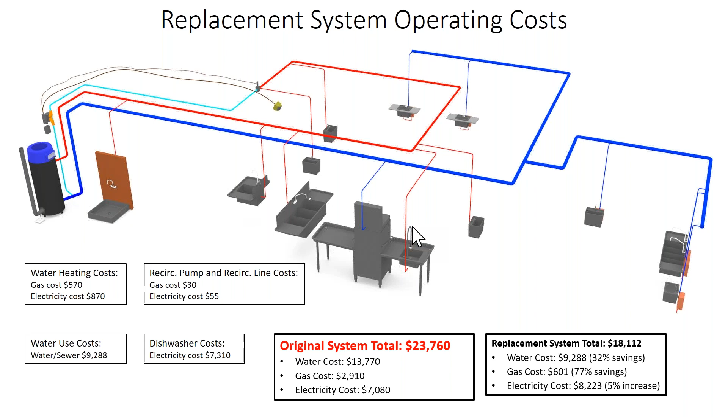What we did at this restaurant was pull the dish machine off of the hot water system. We replaced it with an exhaust heat recovery dish machine that only takes cold water as its feed and provides all of its own heating. Through that, we found a fairly cost-effective solution.

Ultimately, I want to go and do that in some schools. Carrie mentioned in her presentation some domestic hot water projects she was considering, and one of the results was that the most cost-effective solution was to either downsize your hot water system or basically disconnect it, which is a great option for a lot of schools that don't have commercial kitchens or cafeterias.

The way I want to do that project-wise is to solicit the IOUs for some codes and standards support. One of the things I learned in a recent project where I had to read Title 24 was that Title 24 basically considers heat pump water heaters to be a residential-like technology. So there's a need to do this research on other building types.

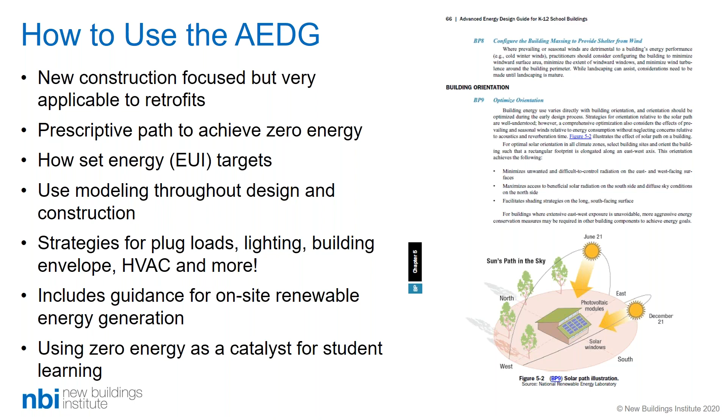The accompanying guide to the AEDG is the Zero Energy Process Guide, and in 8 steps, it outlines how school stakeholders can be involved in the school design and construction process, to make sure zero energy design goals are introduced early and maintained well after the school is operating. That document is more broadly stakeholder focused, so it can be useful to take to your stakeholders when you're communicating and trying to sell zero energy effectively.

The USGBC Center for Green Schools also hosts this online learning lab with curriculum resources for sustainable schools. This is really cool, they recently launched something called the Building Learners Program, which ties all the school energy data to math and science activities. This is a big deal because it's free right now due to COVID-19.

This is typically not free, you either have to be a teacher or pay to access it. So I highly recommend you go in and check it out. You can sort on subjects like engineering, career tech, or even music and art, and then sort by grade level and theme, like energy, transportation, and public spaces.

You could sort by music and transportation and see what pops up. And again, this is free right now. I spent a lot of time in here. There's a lot of really great stuff in there. There's also just a multitude of other resources that might be useful for your path to zero.